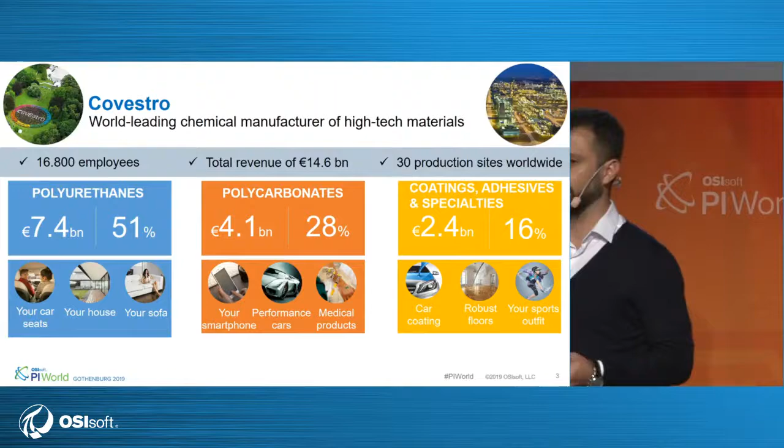Our company, Covestro, is a world-leading chemical manufacturer of high-tech polymers. We have 16,800 employees and over 30 production sites worldwide. Our portfolio mainly comprises polyurethanes, often used in insulation and foams in cars and houses; polycarbonates, primarily used in the automotive, electronics, and medical industries; and coatings, largely used in vehicles, buildings, and sports apparel.

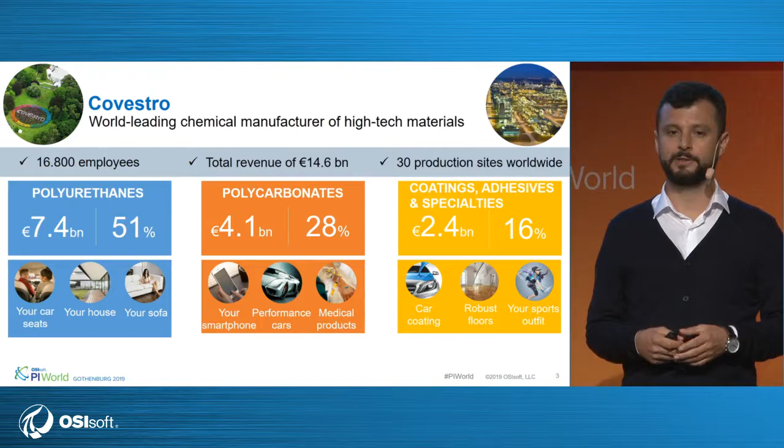Last year, Covestro had a total revenue of 14.6 billion euro. And since March 2018, we are part of the DAX index as one of the 30 biggest companies in Germany. As part of Covestro's effort to remain a global leader in the high-tech materials field, we have launched the company-wide digital transformation program, Digital at Covestro. Digital at Covestro seeks to leverage the benefits of digital technologies such as advanced analytics, machine learning, social networks, and e-commerce in three main areas, namely digital operations, customer experience, and business models.

Of particular interest for this talk is the area digital operations. Here, the focus of digitalization has been set on leveraging our vast amount of process data to increase the reliability, efficiency, and safety of our manufacturing processes. This should be achieved by devising methods to collect, structure, visualize, and analyze data in order to predict process behaviors and thereby enable useful use cases such as predictive maintenance and process optimization.

Aligned with this vision, we have launched the ProDavis Digitalization Initiative. ProDavis, which stands for Process Data Analysis and Visualization, is composed of a multidisciplinary group of engineers from different Covestro divisions with expertise in key areas such as process design, simulation, advanced process control, data science, OT, and IT.

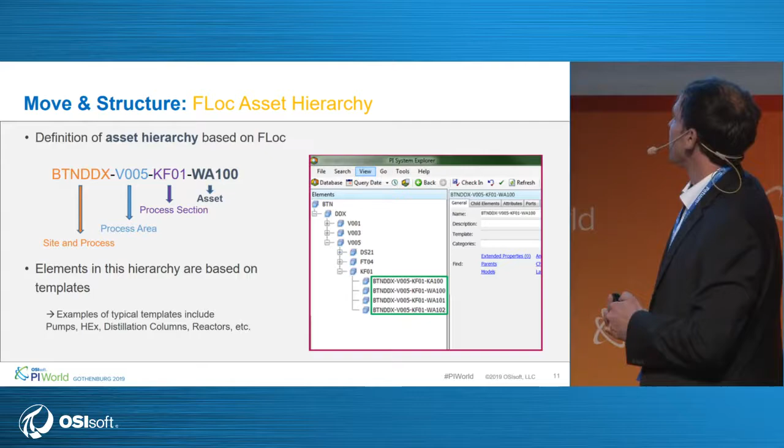Of course, PCT equipment is only a subset. The remaining part of our equipment are our assets, and with assets, I mean our unit operations, like distillation columns, pumps, heat exchangers, or reactors. Here we are using the same nomenclature, except that for the 4th level, we are using the asset name instead of the tag name. The result is a second hierarchy, the asset hierarchy, that consists of all our main unit operations. These elements are based on AF templates, and we have developed AF templates for our most common unit operations in the company.

Let's talk about monitoring. The situation is that we have lots of things to monitor: PCT equipment, unit operations, processes, and entire facilities. How should a monitoring system look that provides information about the most important KPIs? Here we decided to go with PI Asset Framework. We are also using the analysis services, event frames and notifications. On the next slide, we will show you how we did the setup for such a monitoring system.

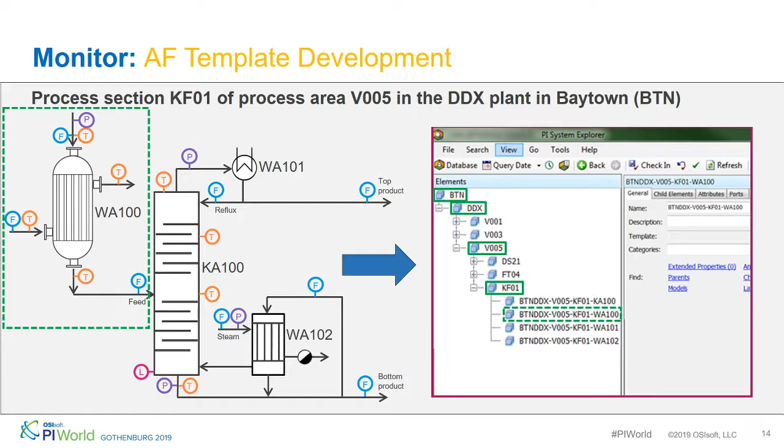And we have templates for every unit operation we see here, for the column, the reboiler, condenser, and the heat exchanger. Because this setup is really common in our company, the reusability of the templates is very high, and this helps for the rollout and also to keep the maintenance effort low.

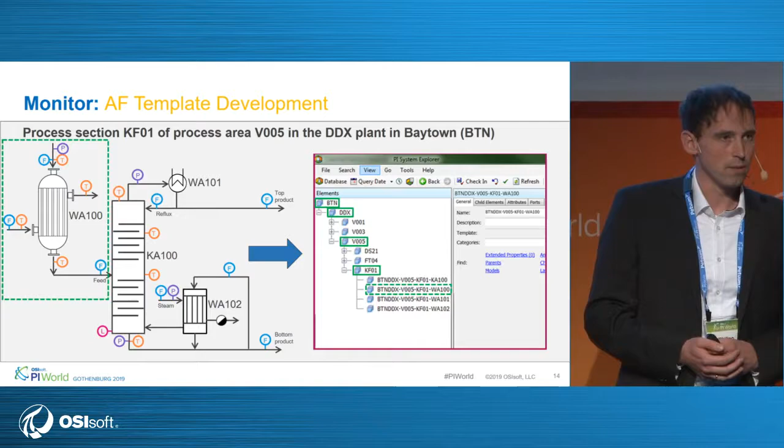Let's take a closer look into the heat exchanger template. Honestly, a very well-equipped heat exchanger, because we have temperature and flow measurements at both the utility side and the process side. One challenge is that only by knowing the name of this temperature, it's not possible to say whether it's an inlet or outgoing temperature, or whether it's on the process or utility side. Or what is the corresponding flow meter to that temperature? Only by knowing the name, it's not possible.

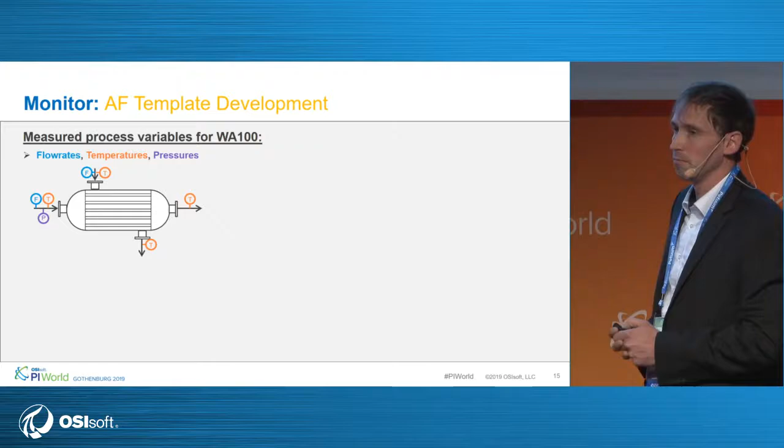But by using the attributes in the PI AF templates, it is possible, because what do you do with the attributes? You add the meaning or the context to a PI tag. And exactly this functionality, adding meaning or context to PI tags, is very valuable for me as a process engineer. But this is not only it; there are also other advantages.

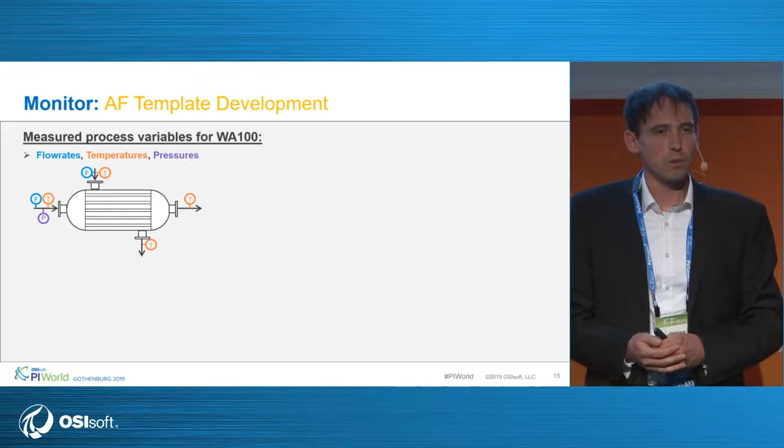One other advantage is that by knowing the meaning of a PI tag, it is possible to do automatic calculations of KPIs. And one of the most popular KPIs for a heat exchanger is the heat transfer coefficient, or the U value. The heat transfer coefficient is defined as a function of two well-defined temperature differences and a flow meter. And the heat transfer coefficient gives you an indication about how easy it is to transfer heat from the hot side to the cold side, and therefore is also a good indicator for fouling.

And thanks to the chemistry in our processes, we have fouling tendencies. So we see a decreasing trend over time in the heat transfer coefficient. Of course, it's nothing new to do fouling indicator calculations, but only by using the templates it is possible to do a rollout at a large scale.

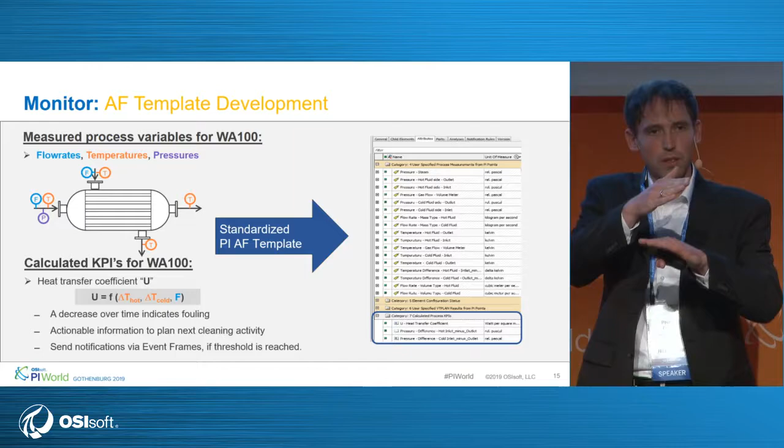Another advantage is that you can create event frames. For example, when the heat transfer coefficient has reached a certain level, an event frame can trigger a notification to inform a maintenance engineer who can then schedule the next cleaning activities.

So, as important as the heat transfer coefficient is to assess the performance of a heat exchanger, it's not always possible to do this calculation because of missing instruments. But thanks to many colleagues, we have a lot of very accurate process simulation models in place. And we can use these first principle models to fill missing instruments. And Esteban will show you how.

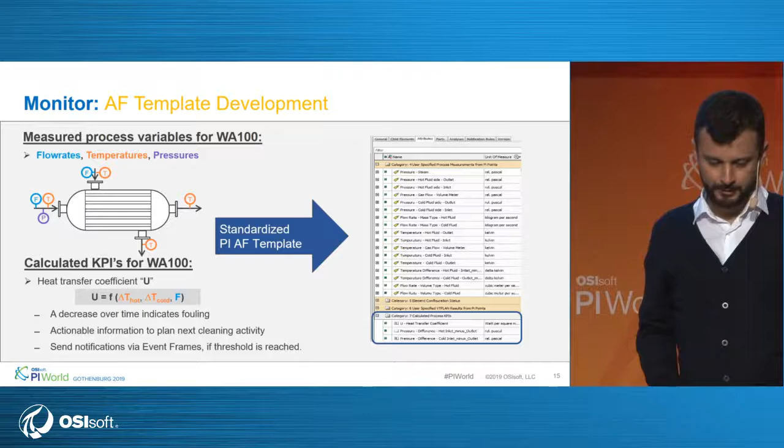Thank you, Philip. All right, so the next step in the workflow is simulate. More concretely, how we integrate simulation results from online models and process measurements. This integration is basically realized by integrating the readings of our field devices with the results of online process models. This allows us to increase the visibility we have of the process.

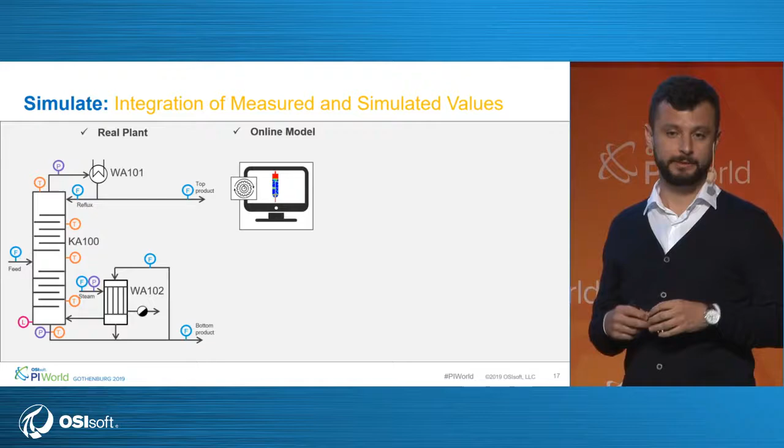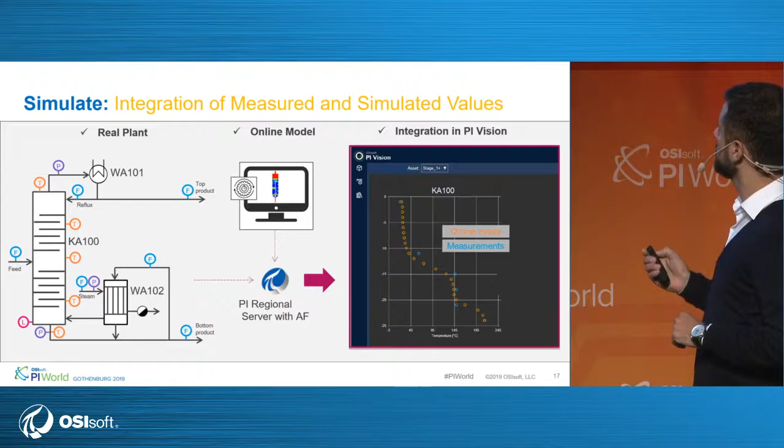The integration happens within our PI AF templates and can be visualized in our PI Vision dashboards. Let me provide you an example of how this works. In the field, we have 5 temperature measurements to monitor the profile of this column. The blue points in this graph depict the respective values. The online simulation model of this column, however, computes temperature values for every column stage, providing us with 25 different values to monitor the profile. So you can see here the orange points in the graph.

Note here how simulation allows us a better visibility of the function of the column by providing us values for those temperatures that are not directly measured. If the model is accurate enough, this could be a viable alternative to replace missing instrumentation. Now imagine here the potential savings when considering that an installed field device measurement can cost up to several thousand euros.

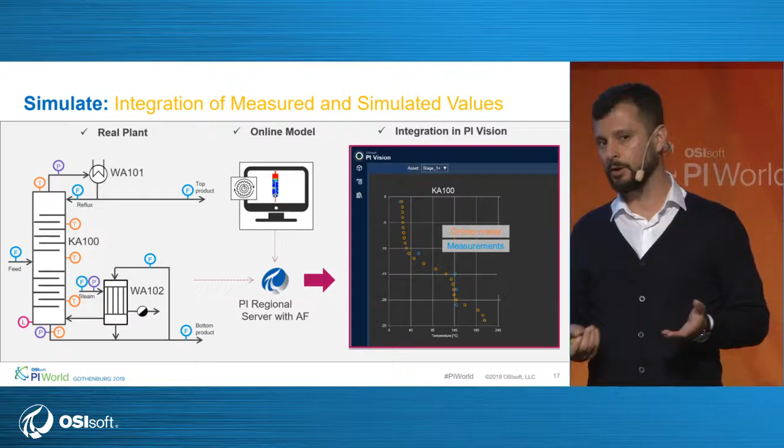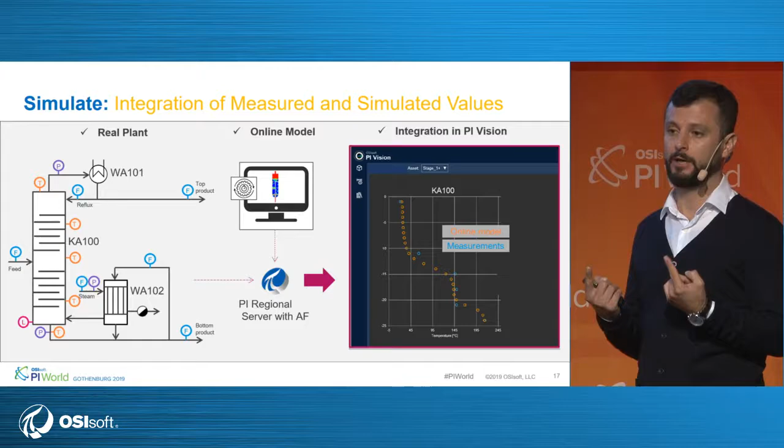Note besides that this integration allows us to detect deviations between measured and simulated variables, which may indicate process anomalies. In fact, we have extended this comparison concept to do some sort of process-wide monitoring. And this was achieved by developing tables in PI Vision. The columns of these tables depict the current measured and simulated variables and their respective deviation.

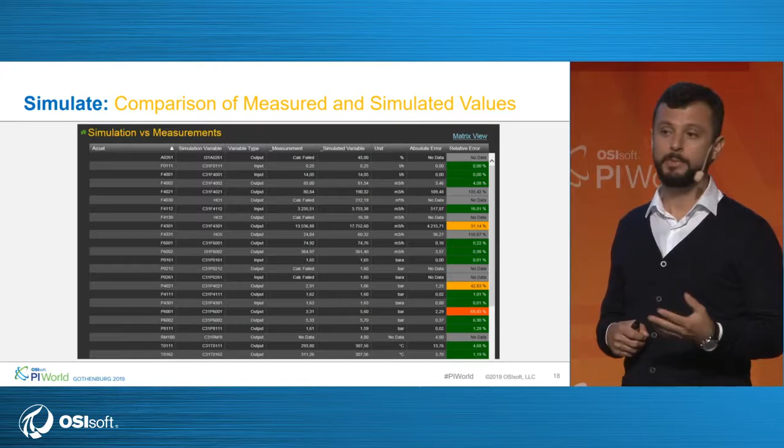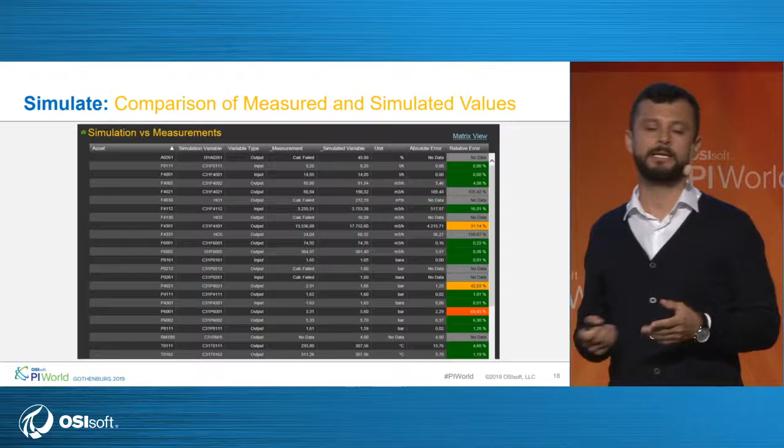So by using a color multi-state, it is pretty simple, at a glance, to observe and sort process deviations. Now these process deviations could be mapped or coupled to event frames and be used to generate timely notifications. The question here is what to do once deviations have been identified. This takes us exactly to the next workflow step, analyze.

Aiming at supporting our experts during troubleshooting, the architecture has been seamlessly integrated to third-party analysis tools. This integration happens within our PI AF templates or PI Vision dashboards and allows our experts to move from monitoring in PI Vision to explorative analysis in third-party tools such as Seeq and TrendMiner.

This is as simple as initiating an on-demand self-service analytics session by only clicking a button in the respective dashboard. The initiated session will be pre-populated with all relevant attributes corresponding to this asset or process, and also offers an extensive set of processing algorithms that can be used to solve troubleshooting problems. Let me provide you 2 examples.

Our experts detected an anomaly in one of our columns, and therefore they proceeded to conduct troubleshooting. By clicking the respective button in the dashboard, they initiated an on-demand session in TrendMiner and performed a simple pattern recognition to see if this behavior had been previously observed in the past. A few instants later, results were displayed. As a matter of fact, we had seen this behavior, and the root cause of the problem was quickly identified.

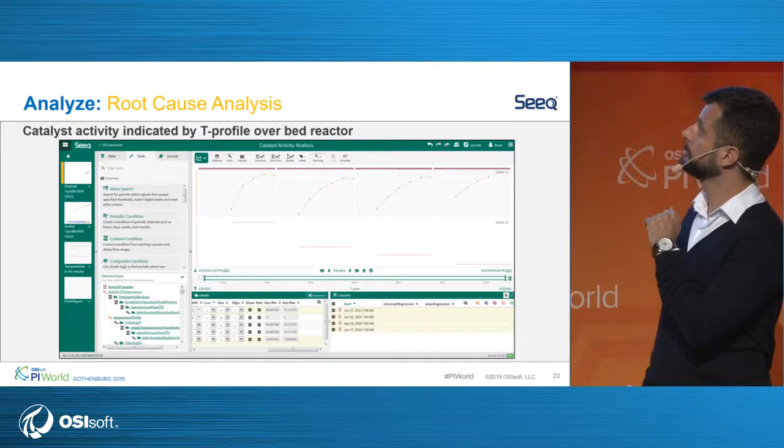In a similar fashion, our experts suspected a decaying behavior in the catalyst activity of one of our reactors. They accordingly initiated an on-demand session in Seeq this time by clicking the respective button in the dashboard, and with only a few steps they could reconstruct the temperature profile of the reactor for several periods along the last 7 years. The generated view, as you can observe, allowed them to verify their hypothesis and generate a consistent and understandable report to experts and the management.

While most common troubleshooting problems that our experts face daily can be solved with this sort of tools, there are some more complex troubleshooting activities that may require automated root cause analysis, scenario testing, or multivariate forecasting. These sort of problems can be best solved by using dedicated machine learning tools. This takes us to the next level of the architecture, Predict.

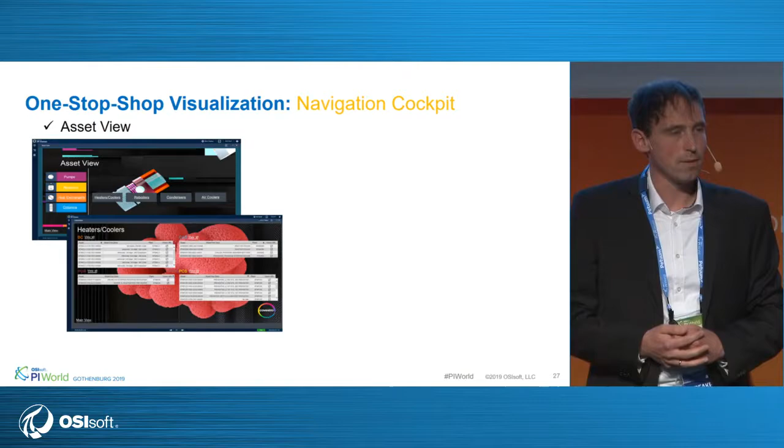Thanks to the template idea, this list is always up to date. You have to create this visualization only once, and then this dashboard pulls information from the AF structure, so the maintenance effort is also very low.

The second screen is a hierarchy screen. Basically, you can access the same information by both screens. The only difference between the two views is the way of navigation. Here, for the hierarchy view, the idea is to get information about the asset associated to one plant. And this is important for our plant engineers who take care about one plant.

Okay, you have basically the same information by both views, and the endpoint of the navigation concept is always the standard dashboard for the unit operations. And I will show you one dashboard. This example is a visualization for a distillation column. You see on this side the distillation setup with the reboiler, condenser, and the preheater. You see some process variables, and on the left side you see the diagrams with the most important process variables, like the temperature, pressure profiles, or the level of the column bottom.

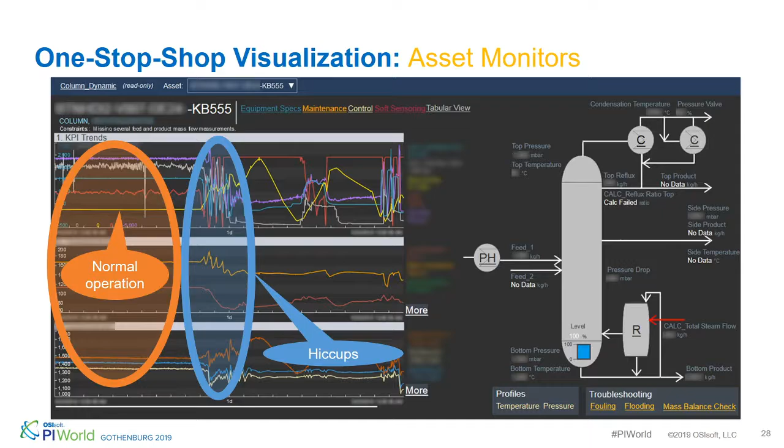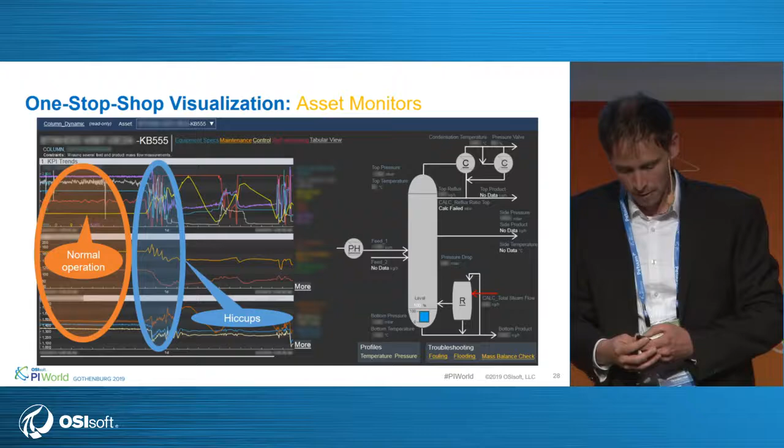How can you work with such a dashboard? At the beginning, you see we have relatively steady state operation, normal operation, everything is fine. A bit later, we see some hiccups. And typically, the process engineer already has a gut feeling what can go wrong. For example, one effect for a distillation column is called flooding. Flooding is when you have too much vapor in the column, and this vapor flow prohibits the liquid to trickle down. And when you have a flooding situation, the column is not able to do its job to separate a mixture.

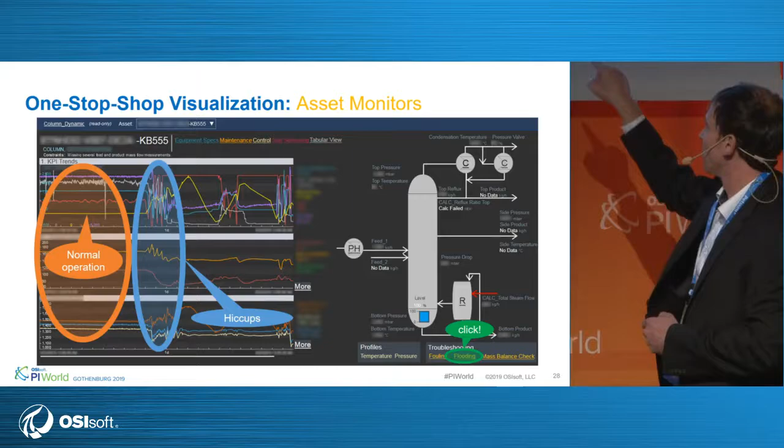Okay, when you have the feeling it could be flooding, we have here some pre-configured troubleshooting screens. So you can click on the flooding screen, and then a new diagram will open with pre-configured process variables that are necessary to assess, do I have a flooding situation or not? And we see here the same time range. At the beginning, more or less steady state, and then the hiccups. But with this time resolution, it's not possible to do any further analysis. So we click to zoom in, and instead of 1 day, we see now only 4 hours, and this is a good time resolution to see the effect.

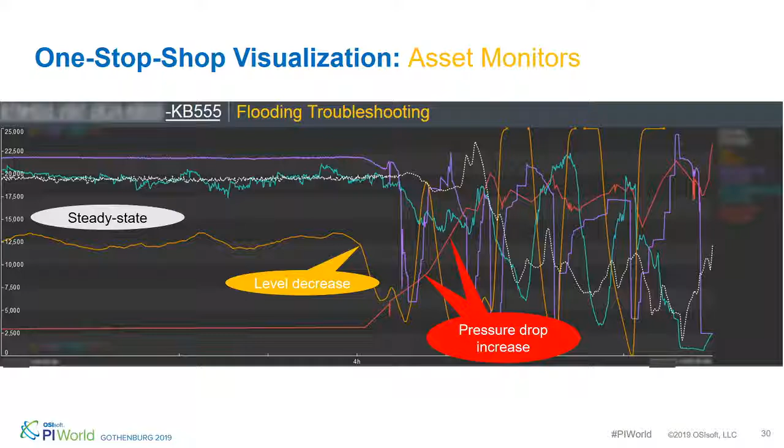We start also with the steady state conditions, and then 2 things happened. The level of the column decreases and the pressure drop increases. The level is the level of the bottom vessel of the column. And the level decreases because the vapor prohibits the liquid to trickle down. At the same time, the pressure drop increases. This is the pressure drop along the column. And the pressure drop increases because our liquid holdup in the column increases too. And this is a very strong indication for a flooding situation in the column.

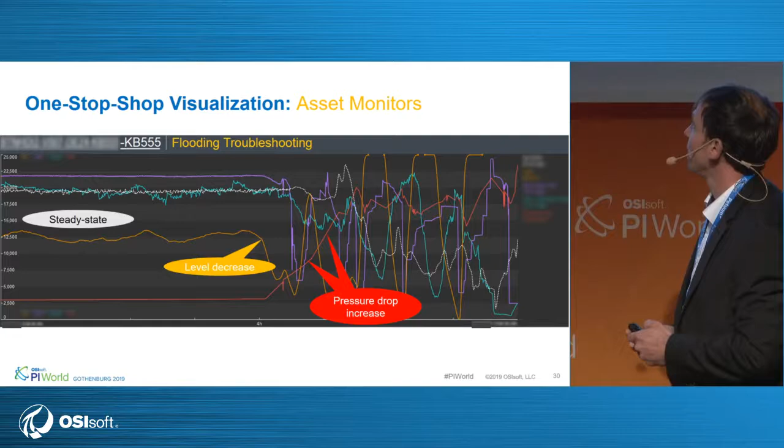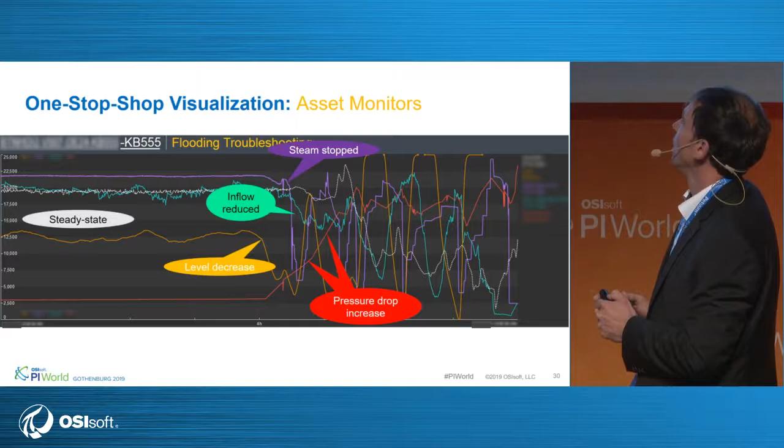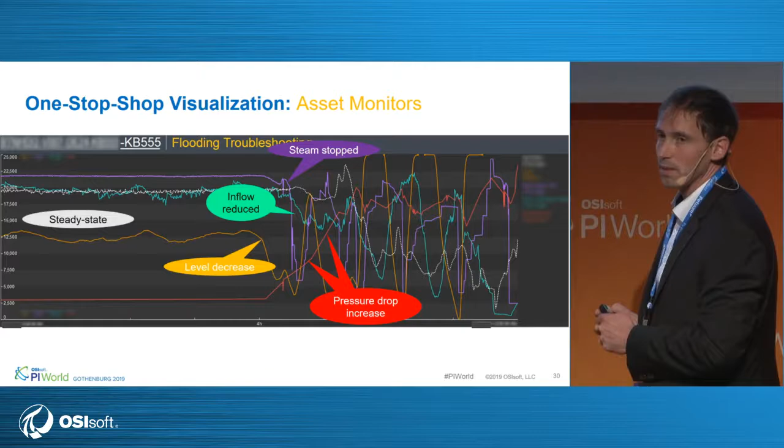The next question is, why do I have a flooding situation? Is it due to a high load, or is it due to fouling within the column? To answer that question, we see some further process variables that characterize the load of the column. The green one is the inflow, and the purple one is the steam. At the point in time when the flooding situation started, the load remains the same. And after the operators recognize that something goes wrong, they even reduce the load by stopping the steam supply. But even by doing this, the pressure drop still increases. So this is a very strong indication that we have flooding due to fouling and not due to the load.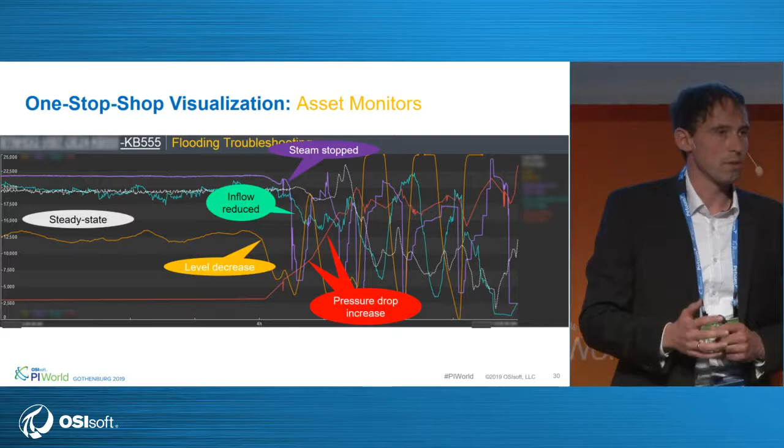In this case, we came very quickly to that conclusion, flooding due to fouling. But sometimes it's more difficult. But even then, these screens are helpful because it's a kind of starting point for further analysis, for example, in the self-service analytic tools or machine learning tools, as the one mentioned before. Okay, this was an example from the visualization concept as a last piece of our workflow. So we are almost at the end of our presentation. I will hand over to Esteban again, who will summarize and conclude the presentation for us.

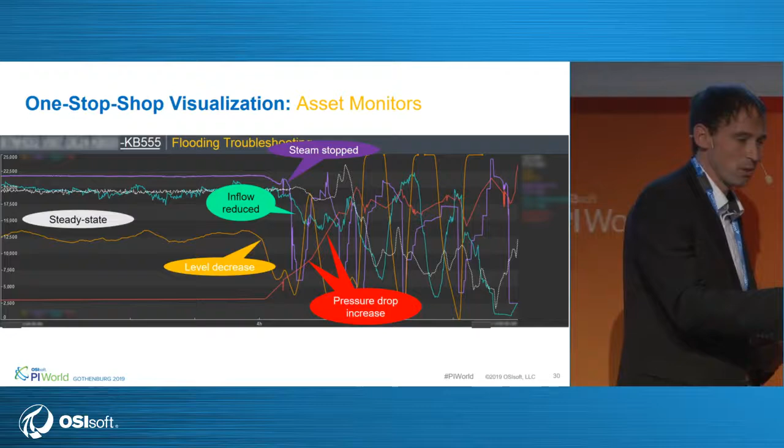Thank you, Philip. All right, so let's summarize the scope and benefits of ProDavis by comparing what we had before and after the project. Before ProDavis, our process experts were often confronted with difficult data access to local PI archives due to IT issues, different naming conventions, and in general, a lack of data context. Our solution was to provide them with a regional standardized platform based on Asset Framework where they can efficiently access the data and the context they require.

Before ProDavis, our experts had virtually hundreds of island solutions for data analysis. Every expert had an Excel table with macros and Visual Basic code to perform calculations. Our solution was to provide them with a set of seamlessly integrated tools, both self-service and machine learning, where they can learn models, analyze process behaviors, and share their insights with other experts.

Before ProDavis, our experts had limited options for data visualization. They used to rely on poorly maintained ProcessBooks. They needed to install software and keep files in their machines to be able to visualize parts of the plant. Our solution was to provide them with a one-stop shop visual interface in PI Vision, where we developed a navigation cockpit with standardized asset and process dashboards. Since then, they don't need to install any software. They can access the data simply by a web browser, and as the platform is centrally maintained, they know at any time that they are working with up-to-date versions of the dashboards.